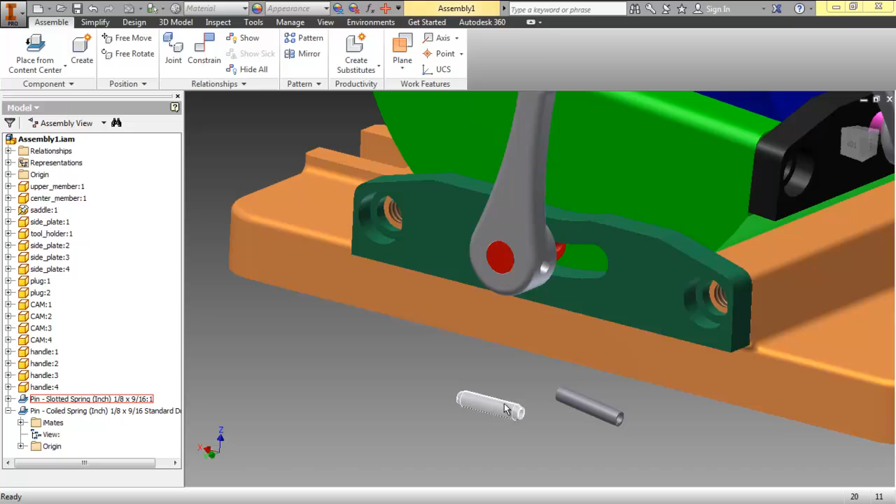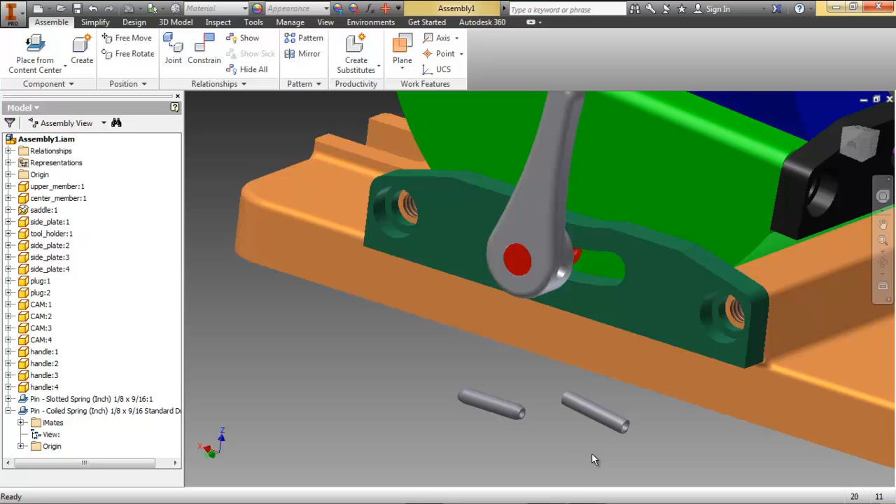Okay, in this video I want to show the constraints of these pins to the handle and the cam so that that all fits together and moves in unison. And actually I've got two different pins here. I've got this slotted spring pin and then the coiled spring pin, and I think that's the one that I called out in the assembly, but we'll show you both of these components. Depending on which one you used, you have to use different constraints.

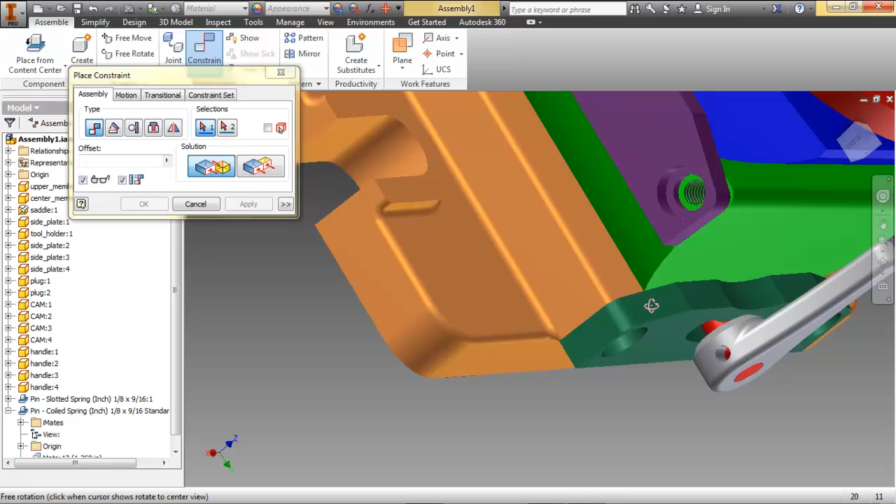So the first thing I'd want to do if I use the coiled spring is I want to get the axis of the overall thing mated with the axis of the hole, and I can apply that, and you can see that then, well, it's zoomed out there somewhere in space. Well, maybe it's hiding in there. I don't know. I thought it should be able to see it.

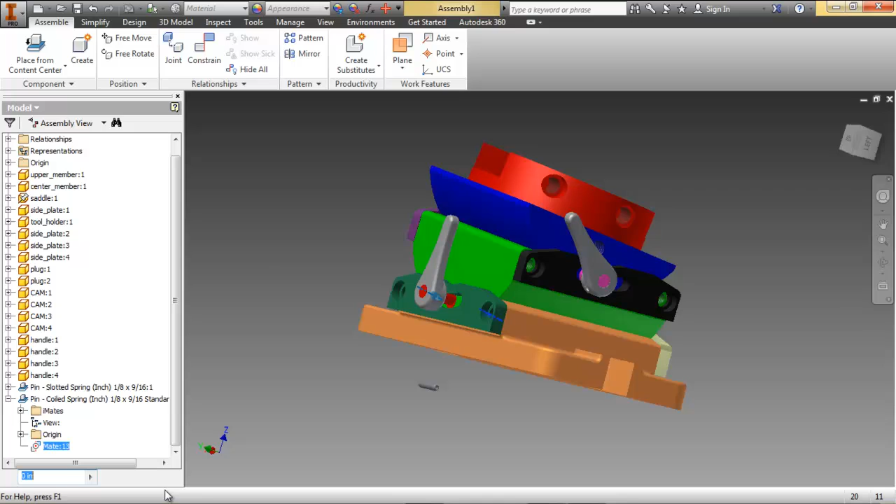Well, now that's an interesting bit there. Let's go back. Oh, there we go. Somehow I got a value in there. It should have been 0. And there's the pin. Now it's lined up with the hole. Okay, and again, this is the coiled spring pin.

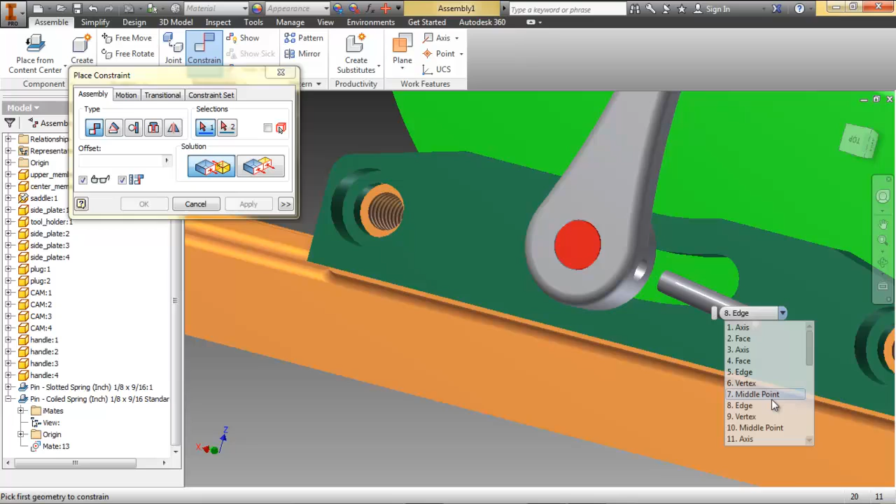So now I'm going to do another constraint, and I want to hover over this axis and let that change so that I can get the other picks. And I want the midpoint, or the middle point of that. And then I want the axis of this, either the cam or this circular part of this piece. And again, I want to make sure that's 0. And we can then go look at this and see that this thing is centered up in that hole.

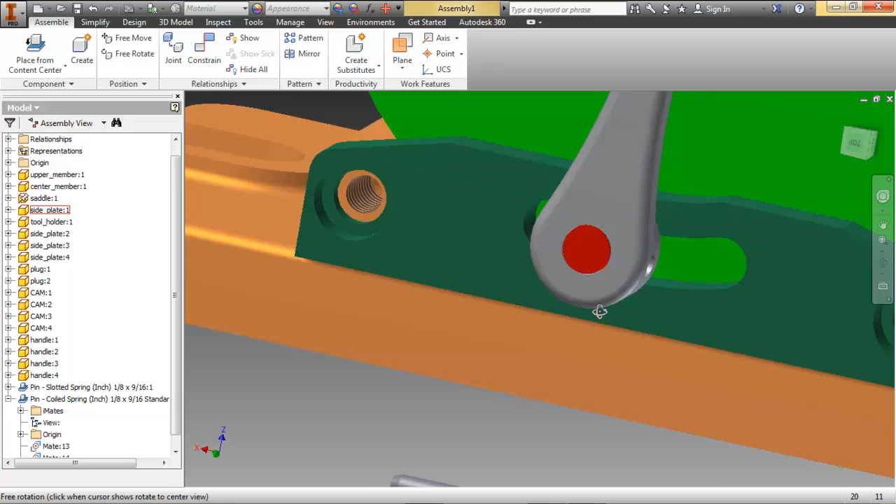So again, what we did was we took the center point right here and mated it up with the axis of either the cam or the handle, and that makes this piece then centered on both of those pieces. So that's the technique if you were using the coiled spring pin.

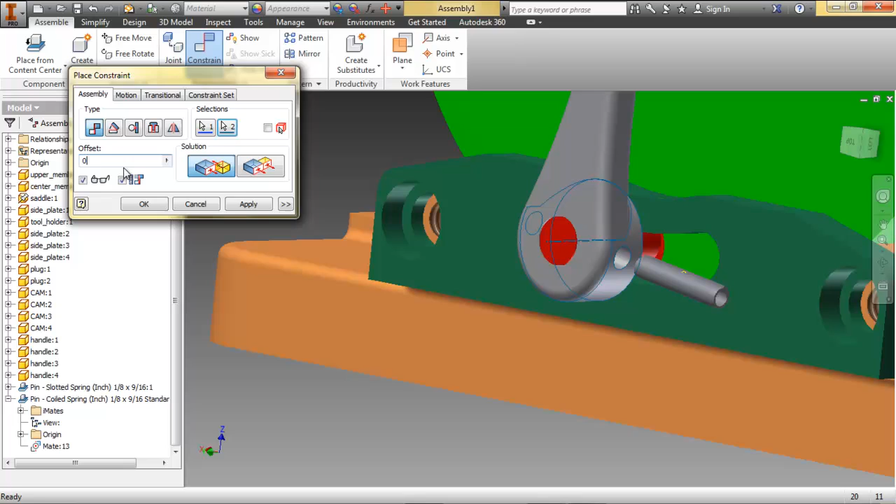And again, if I wanted to get that to go back in, I just constrain, hover over this axis, make sure the axis is showing, hit the middle point, and then the axis either of this piece or of the red piece, it doesn't matter, and make sure that's at 0. And then you can see that if we go in and turn the visibility of that handle off, you can see that that thing is centered on that pin. So that's one technique.

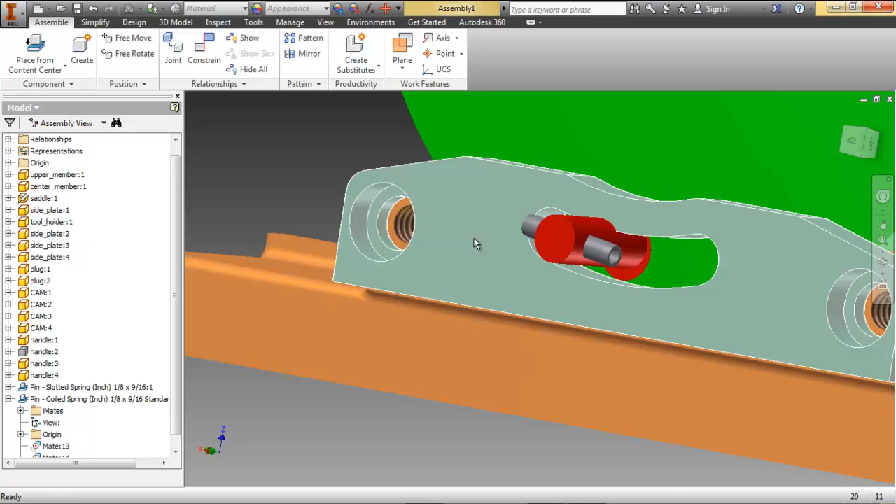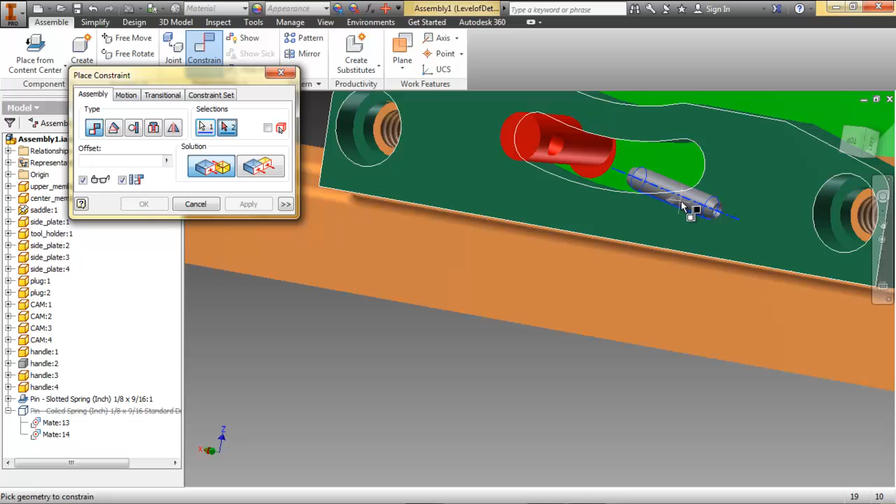Let's just suppress this right now, and now we'll go back and look at this. This is the slotted spring pin. Now again, this one's going to be a little different because of the way it was created. I want the axis of this and the axis of the hole, and then that thing is sliding along there. Okay, and then now if I try to get the midpoint of this, you'll note that it doesn't have a midpoint. Even if I scroll down, there's no midpoint.

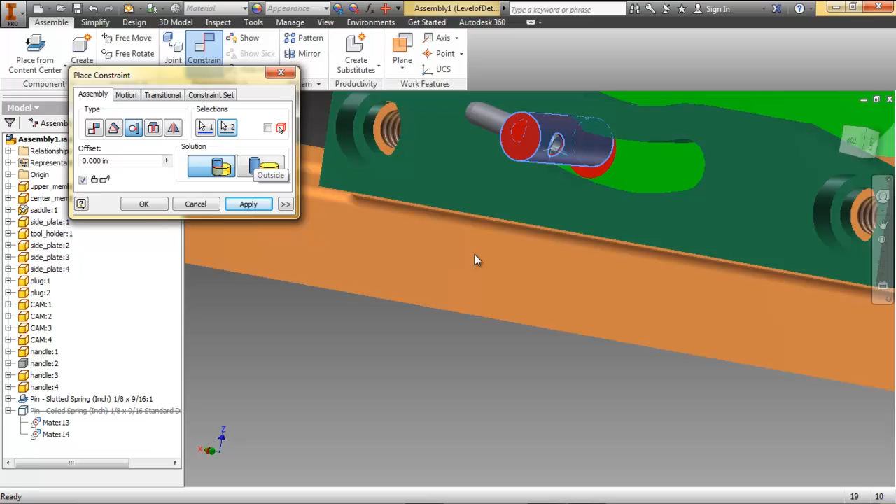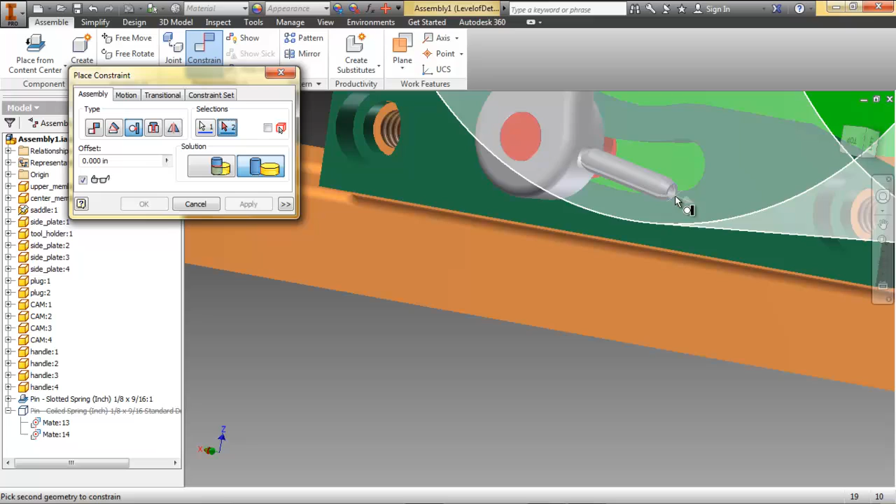So what I'm going to do then is I'm going to go to tangent, and I want this face right here to be tangent with that, and then reverse the, oh, I'm sorry, I can't go tangent with that face. I have to go tangent with the handle, so I'm going to have to turn the handle back on, and I'll do that again, a tangent, and I want this face right here. I can get it to stay there, and this cylindrical face right there, and then switch that,

and then you can see that, well, did I get the wrong, I must have got the wrong pin. Let's see what that pin looks like. Oh, it says 9/16. I should have used a 5/8. So I'm going to go in there then and component, replace, or actually I can just go in there and I can double click that. Well, I didn't want to open the part.

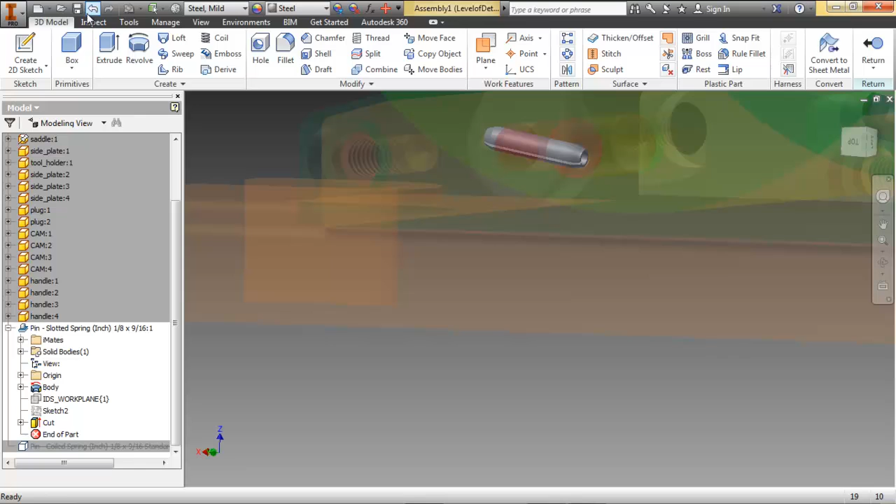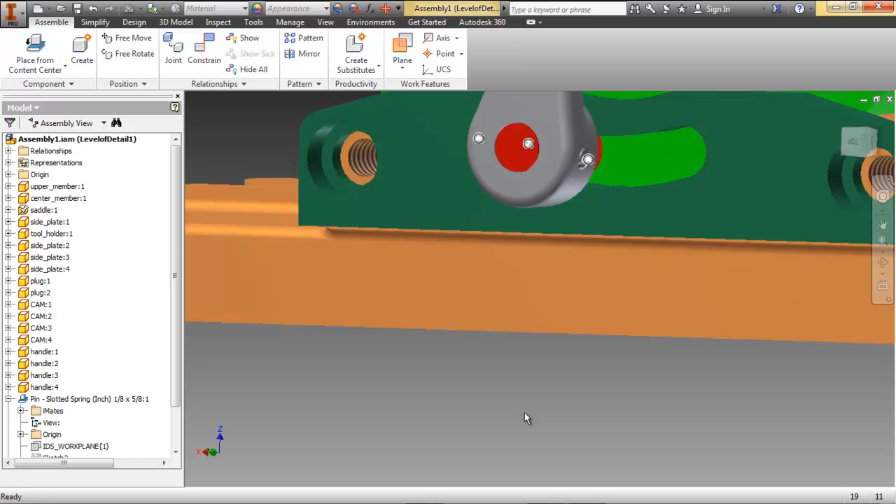Right click, let's hit edit here once and see. No, that's not what I want to do. I think I can change that easy enough. Change size. I really wanted that to be 5/8. I missed that. And now we can see that that thing's centered up.

So sorry I didn't get that right the first time, but that's the way you would constrain that depending on which one of those two components you used. So hopefully that helps.